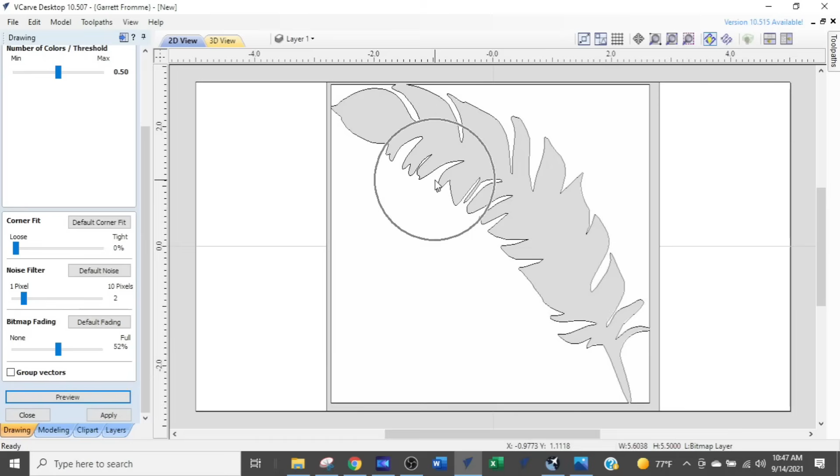So we are going to come back here, and we're simply going to make sure that we are selected on black and white, and we are going to go with the defaults that Vectric selects. You see this slide bar here and here at the bottom — Vectric has defaulted to those. We can adjust those if we want, but because it's a very stark contrasting image, it'll come out quite nicely. Simply go down to the bottom and select Preview, and now you can see we have vectors around our image here, and we're going to click Apply and Close.

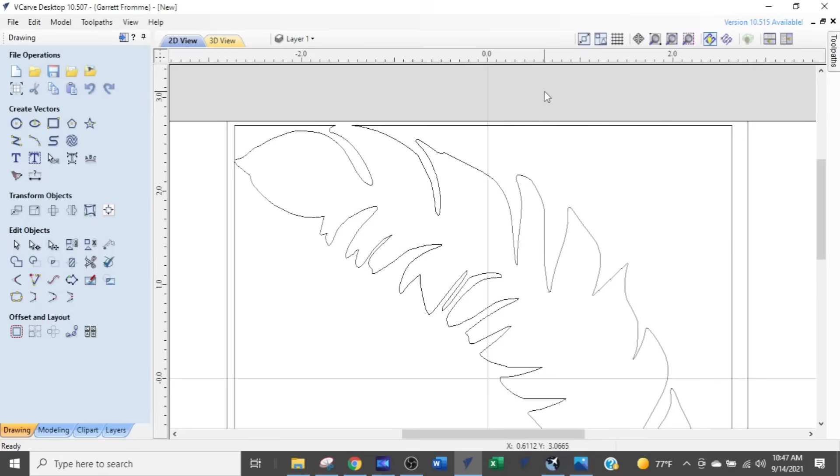So now we come up to the layers area right here, and when it turns blue you click it with your mouse button and this box will open up, and you see there are two layers: a bitmap layer and layer 1. When you imported the picture, it created a new layer called bitmap layer, and that's where the image is at. We don't need the image anymore, so we're going to turn that off by clicking the little light bulb, making sure it says layer 1, and click off.

And there is our feather, but we have to do a little bit of work to it, so we're going to doctor that up. This is why we have to do work to it: you can see the border here is part of the feather. So if I clicked anywhere on the border, the feather is going to highlight as well. I don't want that to happen. I want to make the feather all one vector.

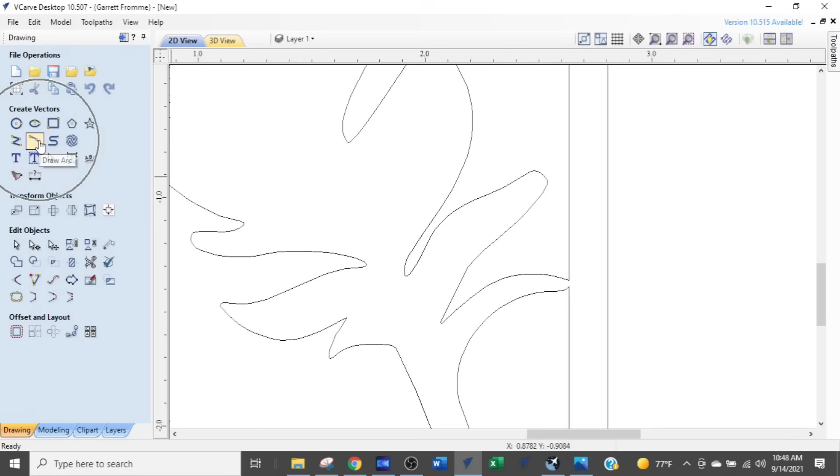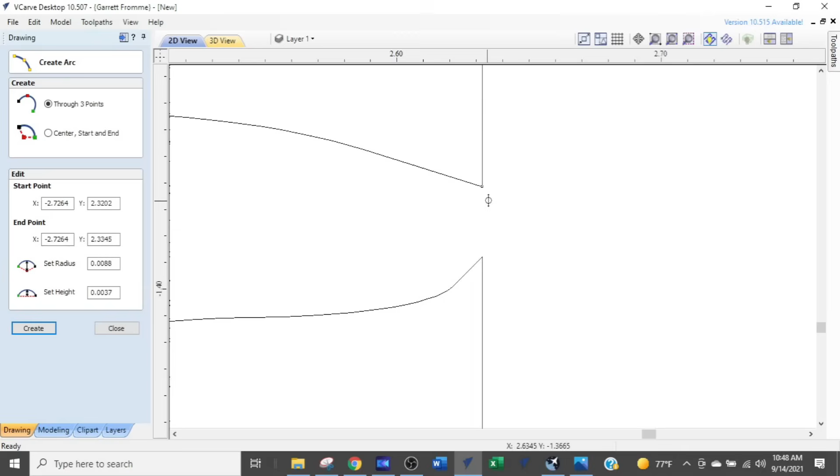So what I'm going to do is grab the curve or draw arc tool, and make sure my snaps are turned on. Both of these first two have to have boxes around them, meaning our snaps are on. Then I'm going to hover over that intersection point, and you can see a little black dot showing up, meaning we're now referencing that point. We just hover over it and click once, and now we've clicked right on that corner.

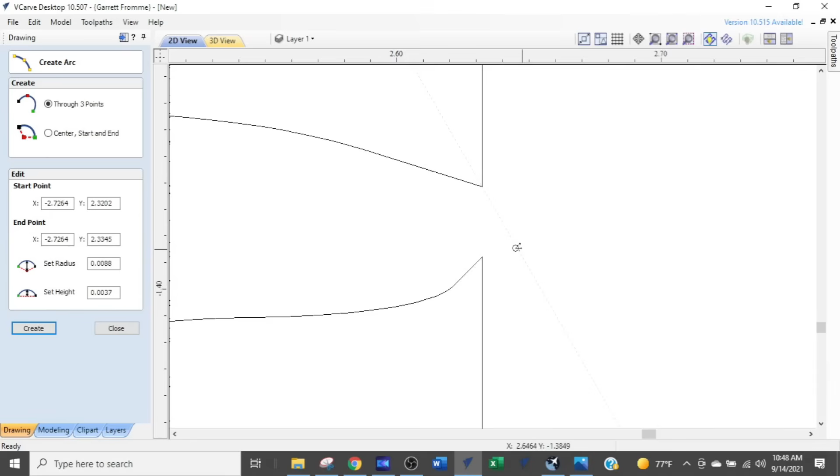And we're going to come over to the other corner and click on that, and then make a little arc about like that. You can see it's not totally clean, it doesn't flow smoothly, but considering the size of this 10-inch piece, you'll never see that minor deviation, so we're not going to worry about it.

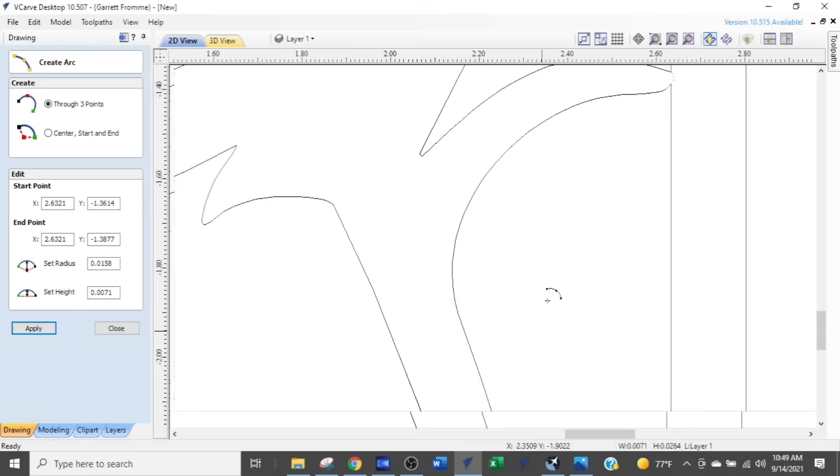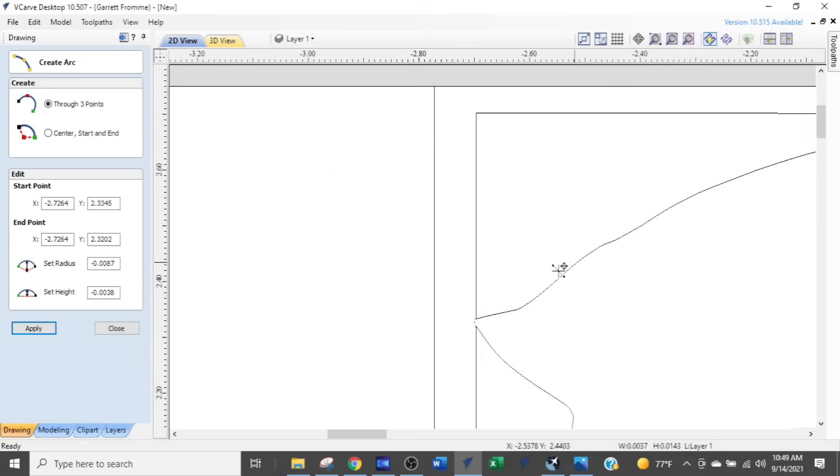And then we're going to do the same thing to each one of these, grab each corner and create the arc, same thing up top, and right here. And there we go. So now we close this, and we're going to grab our scissors right here, because we're going to snip out these things now.

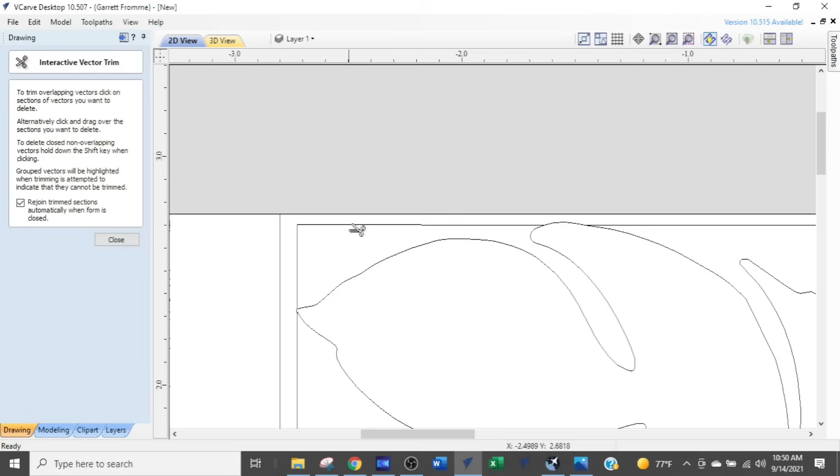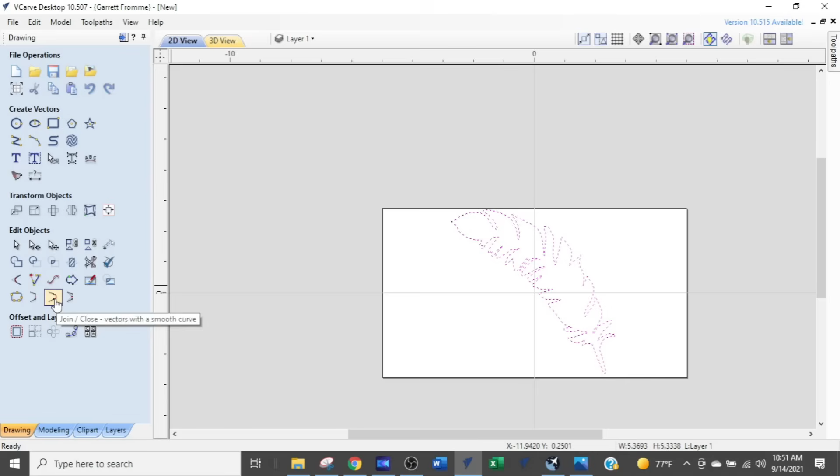The software is now giving us the ability to cut away these areas that we don't want, so we're going to click in each one. We've gotten rid of those, and one more, then we're going to escape, and simply select that box and delete it. And there is our image. Now I select the feather, and just to make sure everything is connected properly, I'm going to come over to Edit Objects and select Join or Close Vectors with a Smooth Curve, and select it several times. And we are done.

So now we want to get the leaf rotated appropriately, so I'm going to click it twice, and these buttons come up around the leaf. I'm going to grab this outer button right there—you can grab any of the four corners—and rotate it to about where I want it, which is about right there.

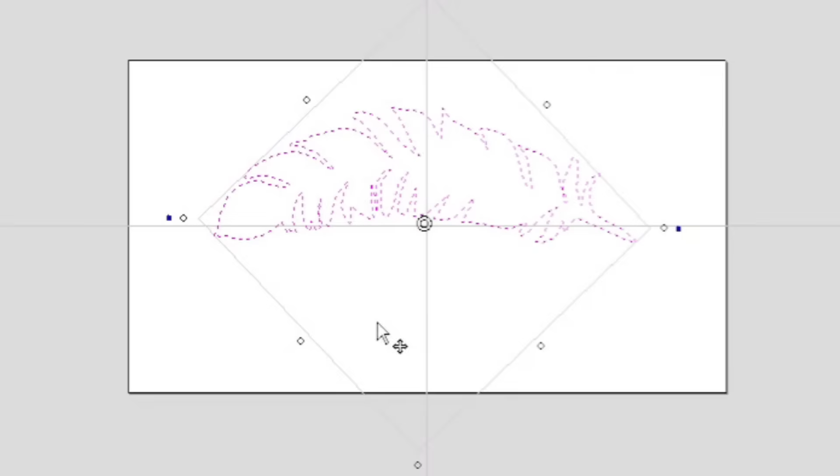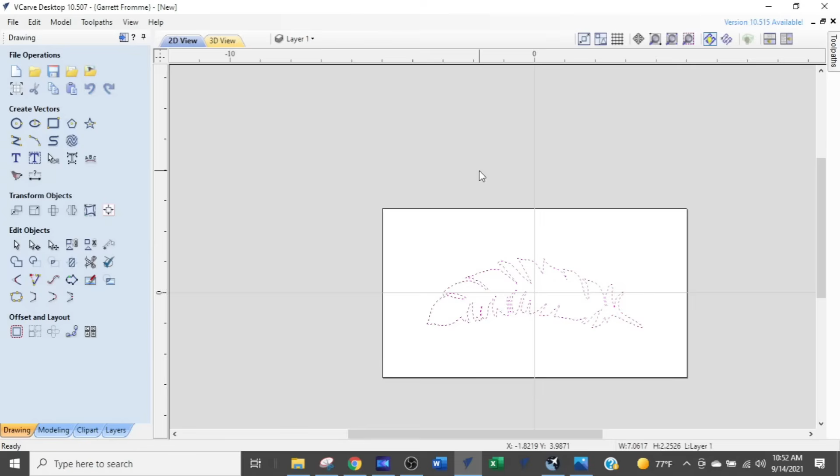And then we want to center it on the project, so we come over and click Align Selected Objects under Transform Objects, and we're going to align it to the job center by selecting this middle button. That'll move the whole drawing to the center of the project, and now you can see the feather is in position. So we'll close that, and we are done with our base drawing.

Now we have to make a quick distinction here so you know the terms I'm using. We have two components we are going to be designing: the insert and the base piece where the insert gets inserted to. We're going to call this the male component, and this the female component. So what we're going to do is save this by clicking Save.

And I am going to create a new folder called, we'll call this Feather Teach, for teaching you, because you're going to create this awesome project. So we have a male and a female that we have to create, and we just need to decide which one we're going to create first. It doesn't really matter—this one will be the female, so we're going to call it feather female.

And we're going to say OK. So now we just saved that vector file. Now we have to create the male file. So simply what we're going to do is come up to File and Save As, and we're going to call it male feather. And save that. So we are at a critical point right now.

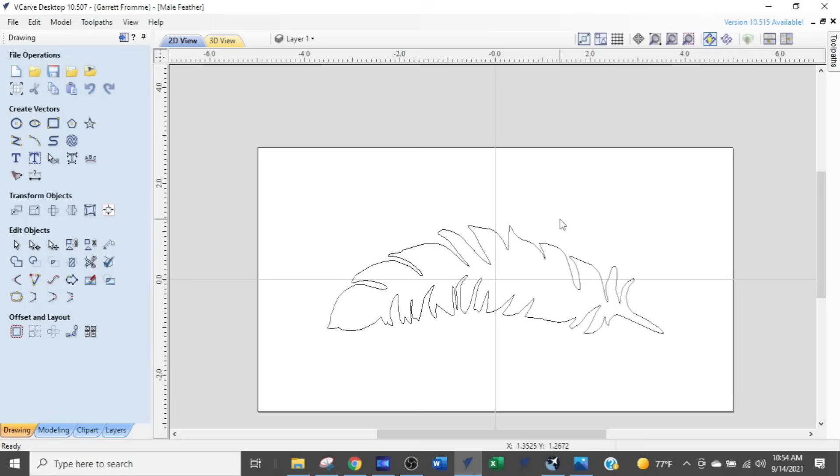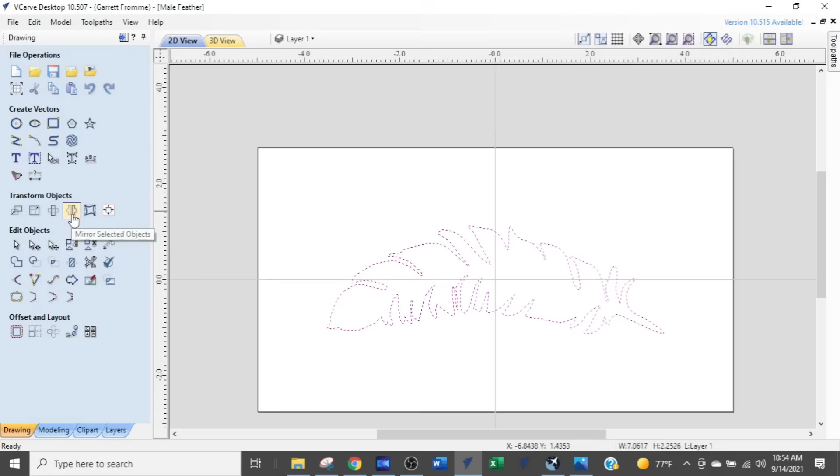Let's keep going. Now we have to create the mirrored copy. What we're simply going to do is select the male feather, and this is where things become very important. In order for this thing to fit into the female feather, we have to create the mirror. The way we do that is come over to Transform Objects, and the fourth icon in will say Mirror Selected Objects.

Select that, and we want to make sure that we are checked on Flip About Job Center, and we do not want Create a Mirrored Copy checked. If we do that, then a second feather will show up as a mirrored copy and the original will stay in place. And we are going to click Flip Horizontal.

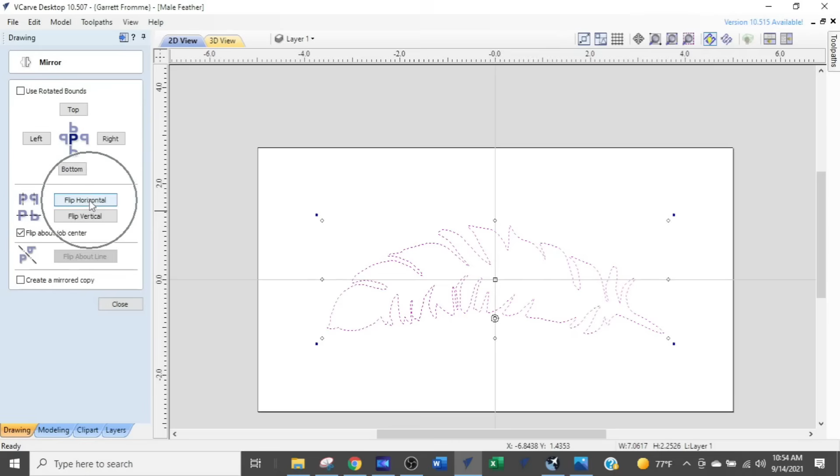And now we have the male feather as a mirror. So we are good to go with that. So we're going to close that. We're just going to save this real quick. And now our base male feather is created.

So what we need to do is create some clearance space so that this feather can slip down into the female.

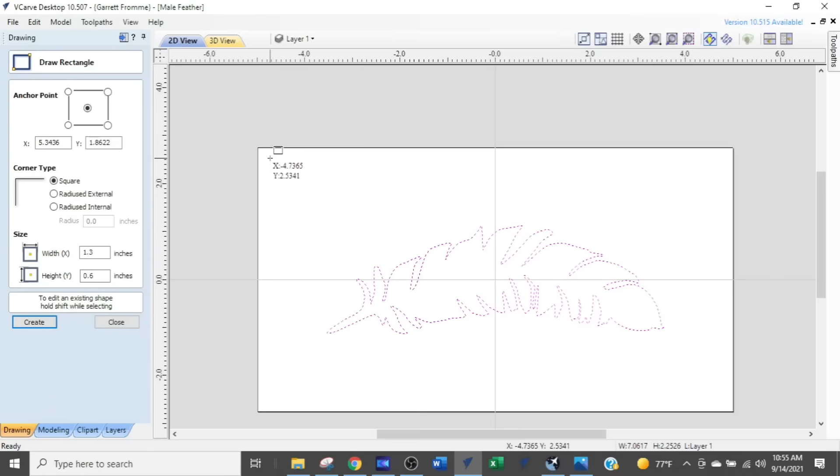One of the things that is commonly taught all the way across the board in all inlay videos I've seen, they come in and they will draw a square that's the size of the project. So let's just pretend this is the size of the project there, and they'll draw a square that big. And the reason being is because you want to clear out all this material so you can overlay this part into the inlay.

And so you need to remove all the material around it. Now, I happen to think that that is a bit of an overkill because you have to machine out all this material in order to make that happen.

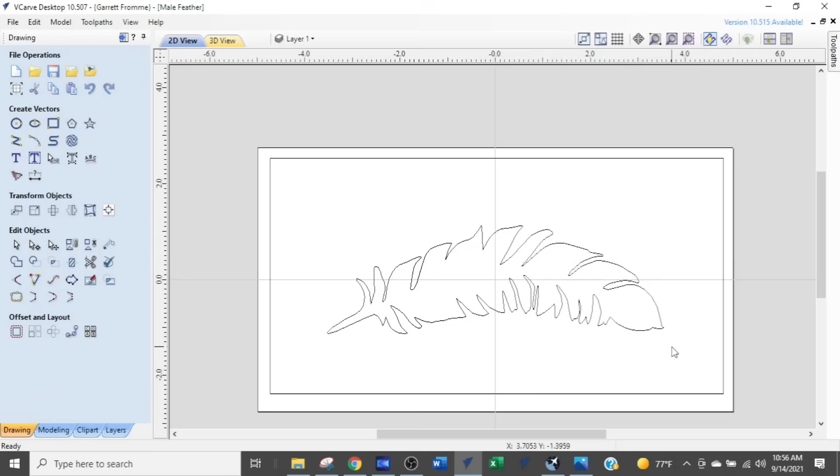Whereas what I like to do is simply cut some of the material around the feather and then take a scroll saw or my table saw and cut away all the material up into the clearance area. So you'll see what I mean about the clearance area. But just leave it to this, that this is taking up a lot of extra machining time to accomplish what most people are teaching. So I'm going to teach you a faster little trick.

So we're going to delete that rectangle. We're going to select the feather, and we're going to come down to Offset and Layout and select the first item, which is Offset Selected Vectors. Click that, and make sure you are clicked on outwards or right, and pick your offset to be between half of an inch to 3/4 of an inch, and I am set at 3/4 of an inch, and we're going to offset.

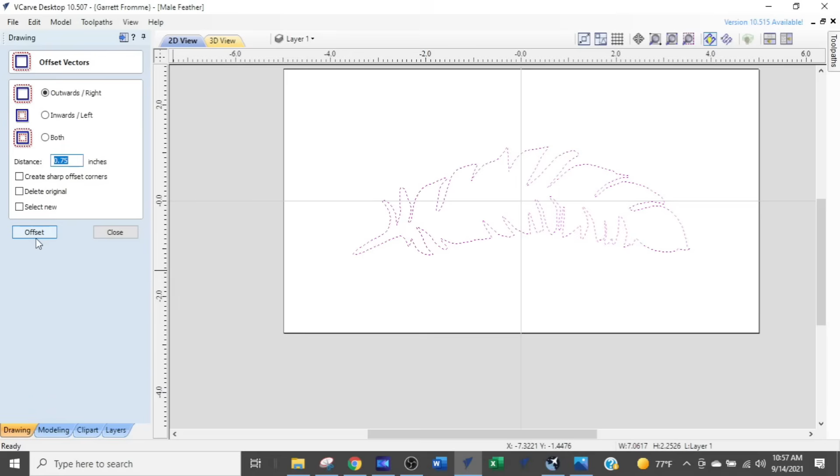Click the offset button, and now you see there is a general shape of the feather. So now all we have to do is clear out this space instead of all of this space here. So this part is done. We are ready to machine it.

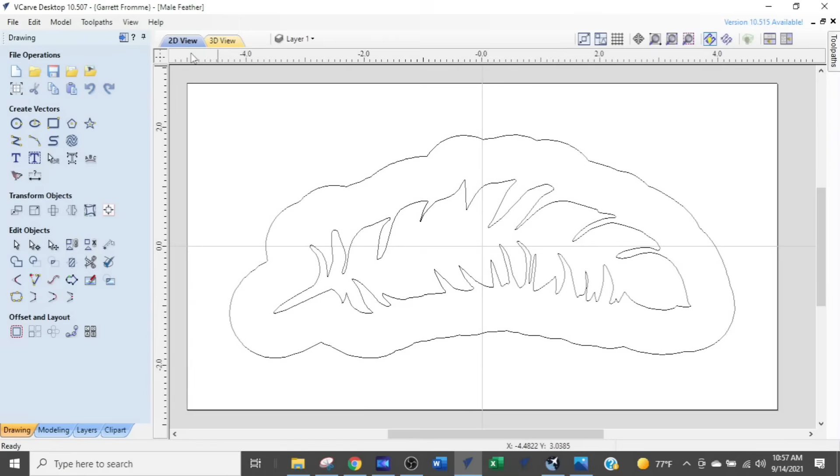So we're first going to save. Click that. And then we're going to click this blue button right up here. So click this button, and that'll turn off the CAD or the drawing area, and it'll turn on the toolpath area.

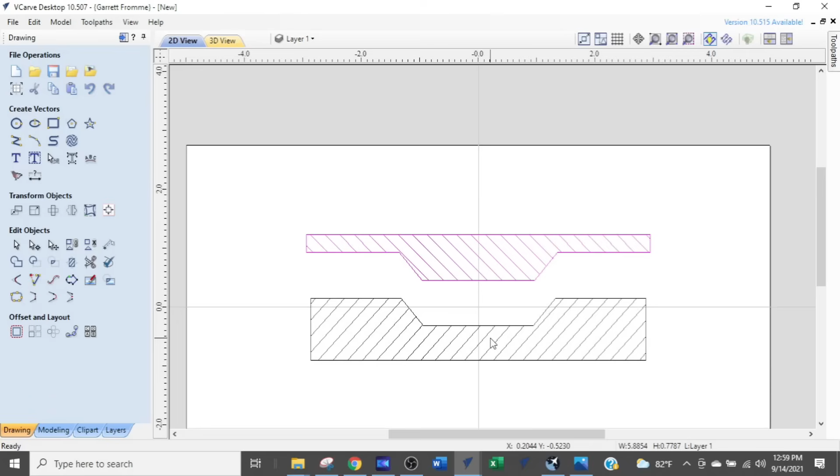So now we are ready to do our tool paths for both our male and our female. But there's something I want you to understand before we get started. So we're going to switch over to another drawing. And so this is effectively what our project would look like if we took a cross section from it somewhere.

This one here is the male component, what we're getting ready to do the tool path for now. And this one here is the female component, where the feather will inset into it. So this is oak, this is walnut.

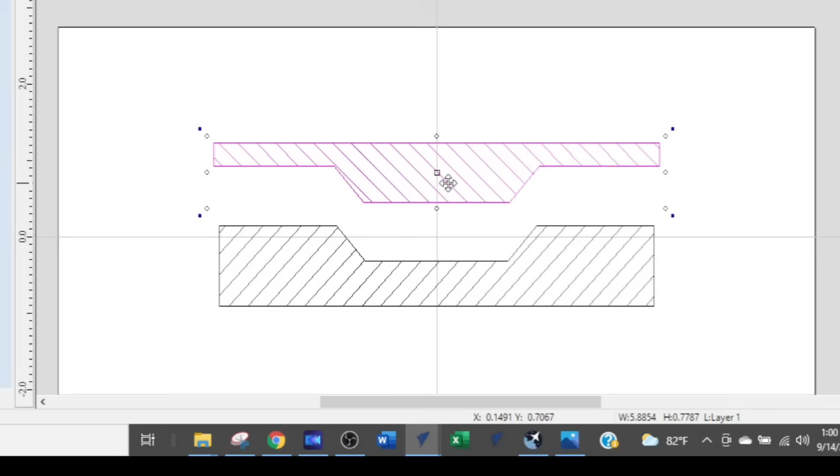Now when we put an inlay into a project, the one thing we don't want is for the bottom of the project to be flush with the inlay, because there's no place for the glue to go. There may be some slight deviation on the side walls of the project that may create some gaps.

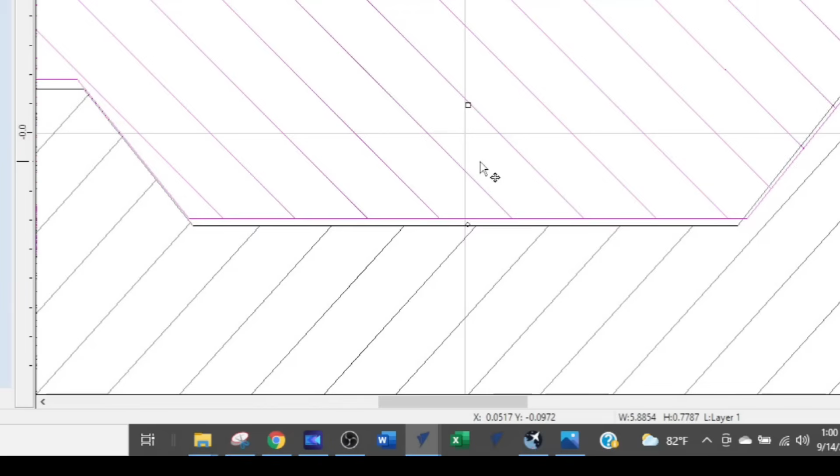So we're going to set up some tool paths. What we have is we are actually contacting the side wall here and over here before the bottom makes contact and before the top makes contact. That way we'll have a nice flush contact all the way around, and we'll be able to clamp the top piece down to the bottom piece, and there will be no gap in our inlay.

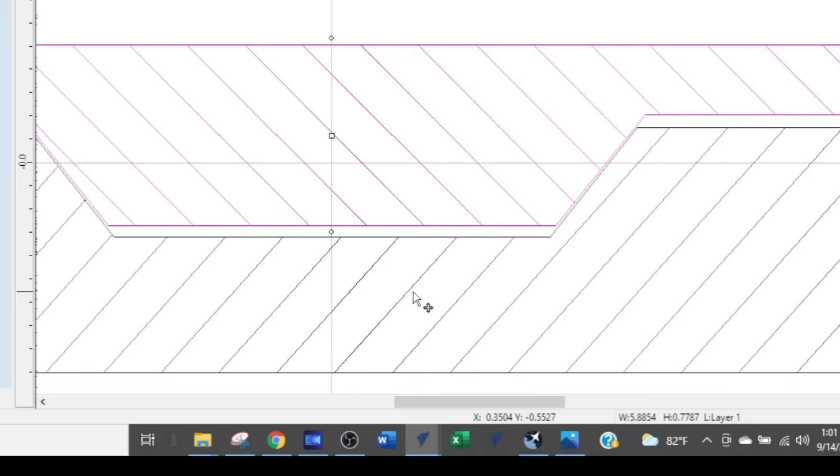The numbers I'm going to give you, I want you to always use. Don't try to reinvent the wheel. They work for many people. You've probably watched a lot of videos of inlays, and people use some random toolpath numbers. I want you to use these numbers and trust that they will work as we go along.

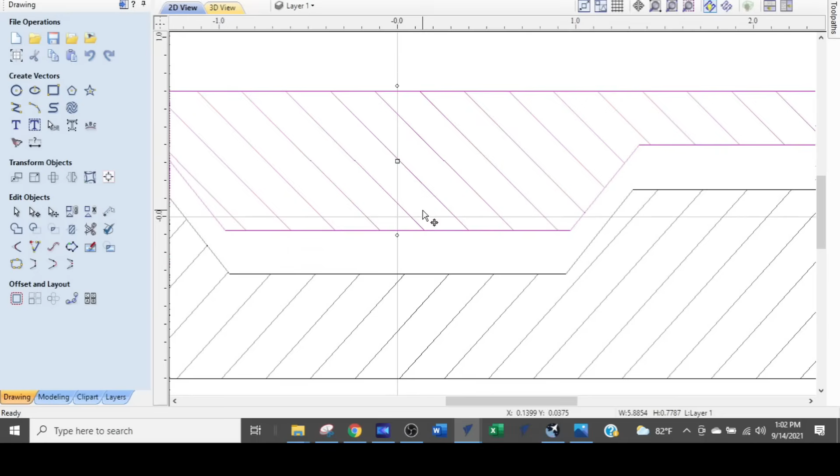Okay, so the first thing to know is when we look at this, because we are tapered, we're going to use a V-carving toolpath to carve both of these projects out.

However, we have a piece of wood, and we've already created this boundary, and we have this boundary because we need to create a V-carve, and we are going to V-carve between this boundary and this boundary. So all this will be V-carved.

Now if you've done any V-carve work before, you know that the bit will go all the way down until it creates a V in the middle. In this case, with such a wide area, which is something that we want, that V-carve would be really deep. So we are not going to go all the way down.

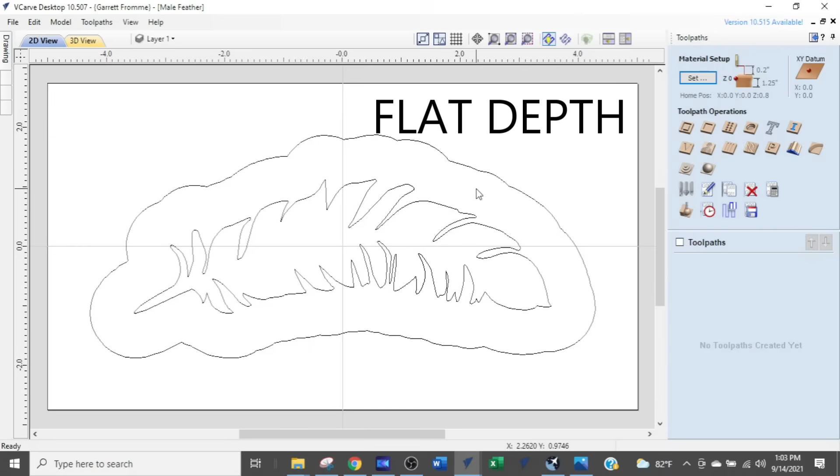We're going to use a special feature in Vectric called flat depth. You will find this in the majority of your paid softwares, and I don't think you'll find them in the freebie softwares like Carbide Create or Easel. However, you can manipulate those softwares to make this work. Also, maybe I'll do a video on that sometime later.

Anyway, so we want a V-carve right in here all the way around the feather. So we are going to use the V-carve toolpath. Now again, remember this is the male, and we are going to use very specific numbers here.

Our start depth needs to be 0.09. Use that number as your start depth. Then you're going to check the flat depth box. We don't want to get this V all the way down, so we want to stop that at some point. And that's what flat depth does. It stops the V-carving at some depth.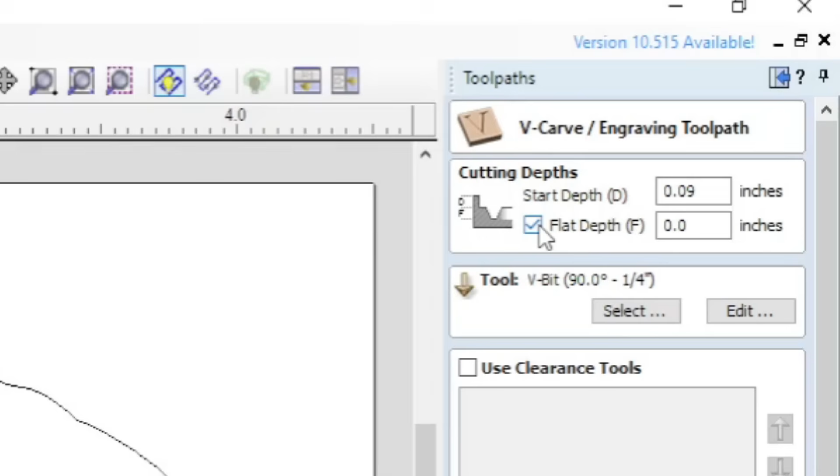And we're going to set that depth to 0.02. What this will do is allow us to have a 0.02 gap right here and right here, which means these two walls are going to make contact, and that's exactly what we want. We need a place for the glue to ooze out from these two contact points. So this will leave a gap underneath for the glue to settle in, and it'll leave gaps over here and over here for the glue to ooze out.

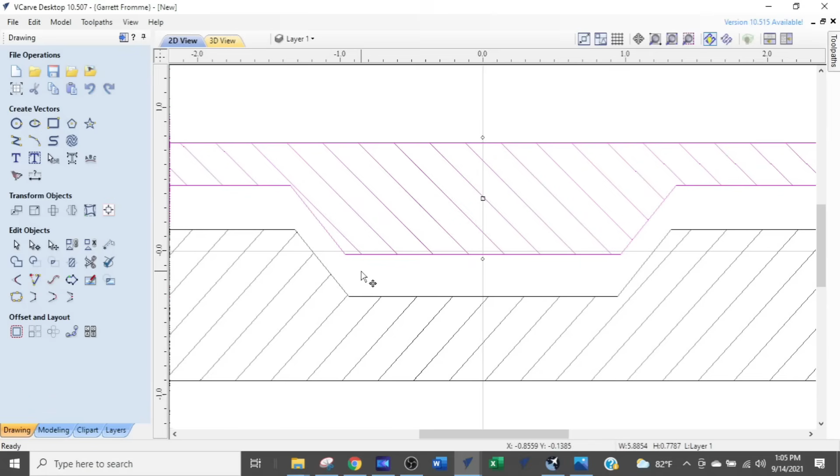So these numbers are very important. Please do not reinvent the wheel and try to use a different number. These work. They've worked across the board. Despite any other YouTube videos you have seen where people use different numbers, these numbers work very, very well. So please use them.

The next is the bit itself. Now, for average size projects like this feather, I like to use the 90-degree V-bit.

So we're going to select that. The bit I'm going to use is the 90 by 1/4 with a bladed edge on it - an actual cutting edge as opposed to a flat edge. Here's the difference between the two. This is a flat edge V-bit - you can see the cutting blade right here, and as it spins around, it's literally scraping the wood away. Whereas the bladed V-bit actually has a forward cutting knife edge on it. It's considered a knife V-bit, and these leave a much cleaner cut.

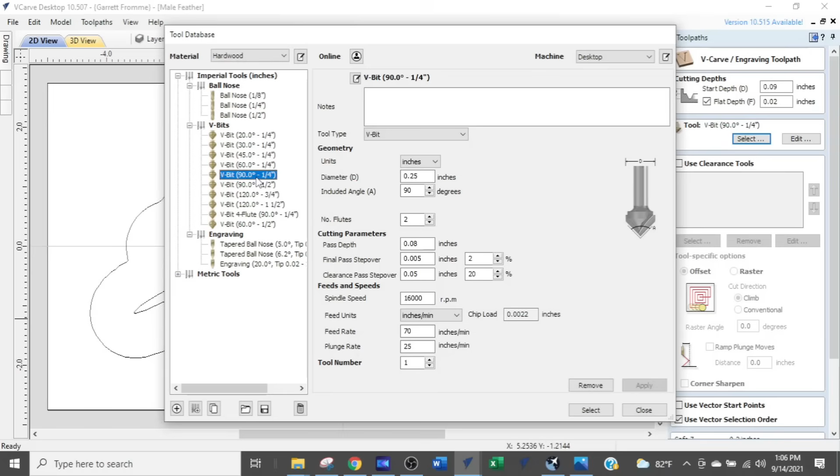So this is the one we will be using, 90-degree by 1/4 inch diameter. I use that because it leaves a much cleaner cut around the project. So it's a 90 by 1/4 inch, and we're going to select that. Now, because we have a flat depth here, as we're set up right now, the 90-degree V-bit is going to try to clear all that out with a point. That's a lot of space to clear out with a point. We don't want to take that time - it'll take a long time.

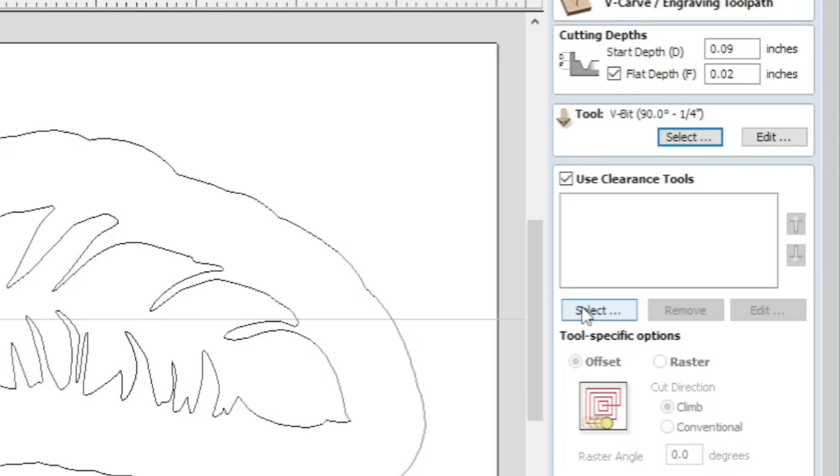So we're going to use the clearance tool feature. You want to check the clearance tool box right there, and you notice that this box now has turned white, which means now we can insert something. The bit I'm going to use is a very aggressive bit, which is an upcut bit - it's a 1/8 end mill. I'm just going to select my end mill here as a 1/8. This is my general end mill 1/8, and we're going to change the settings in just a moment. I'm going to hit select, and now we have the 1/8 bit.

We're not going to use a down cutting bit. We don't need to - we're going to be doing a V-carve, which means this side and this side are boundary, this boundary and this boundary are going to be V-carved. The clearance tool is simply going to clear away the material around the V area just to make things a lot faster. So an upcut bit - there's two reasons why we're using this in an inlay. Number one is the edges don't matter. If you know upcuts, it will tear the upper edge of your project, but in this case it's not going to matter because we're coming back across it with a V-bit that's going to clear all that away. And the second is an upcut bit can be much more aggressive than the down cutting bit.

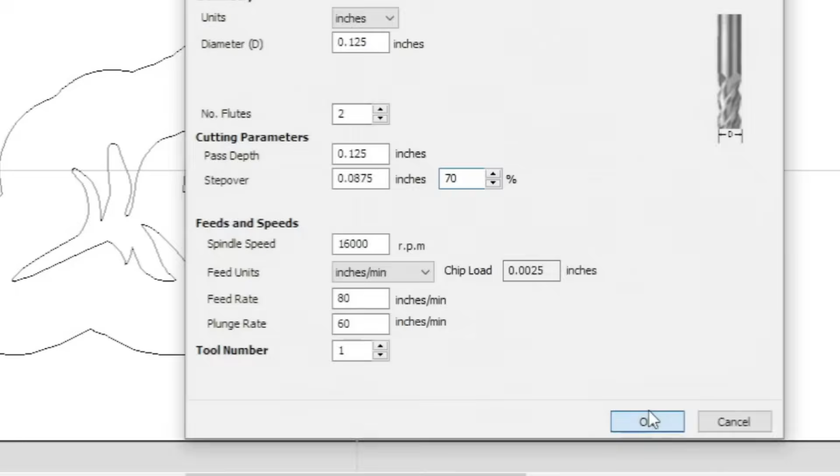So what we're doing is we're going to make that 0.125, which is what you can do with an upcutting bit anyway - you can bring that depth of cut up to the diameter of the bit, or even 1.5 times the diameter. So we've got a very aggressive cut, and we're going with a 60% step over, because I don't care about the finish. I'll even go to a 70% step over - I don't want to exceed 70. And we're going to click OK, and now that is set up.

And now we're all set up. I'm going to refresh or rehash this. When you're doing the male insert, you do this in a V-carve. Your start depth will be 0.09. You will have your flat depth checked, and that will be set at 0.02.

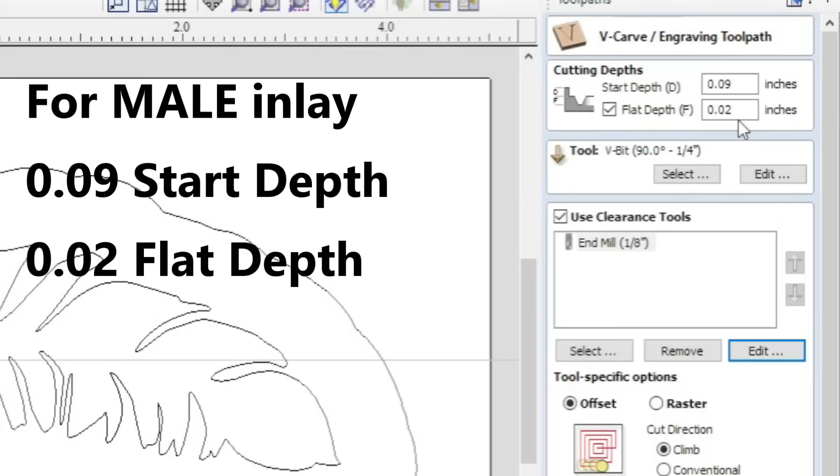We're going to use a 90-degree V-bit. Use a 90 for your average size projects. If you go to small inlays, you'll want to use a 60. If you go to large inlays, use a 120.

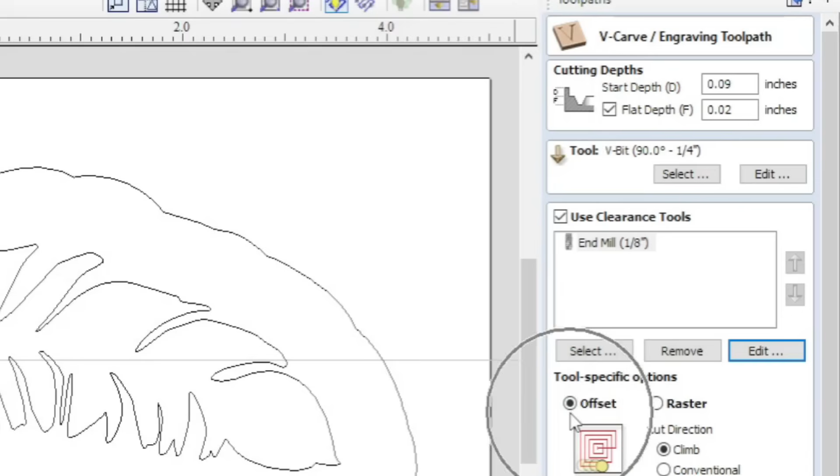I will give you the G-code file. So we're using a 1/8 upcutting aggressive bit at a very high feed rate just to get material out of the way, and we're going to go with the offset cutting method rather than the raster. Climb or conventional doesn't matter.

We are simply going to give this a name. We're going to call it feather male, and we are going to calculate. I didn't select the vectors, so we'll select the vectors and then we'll calculate. And now there are our tool paths.

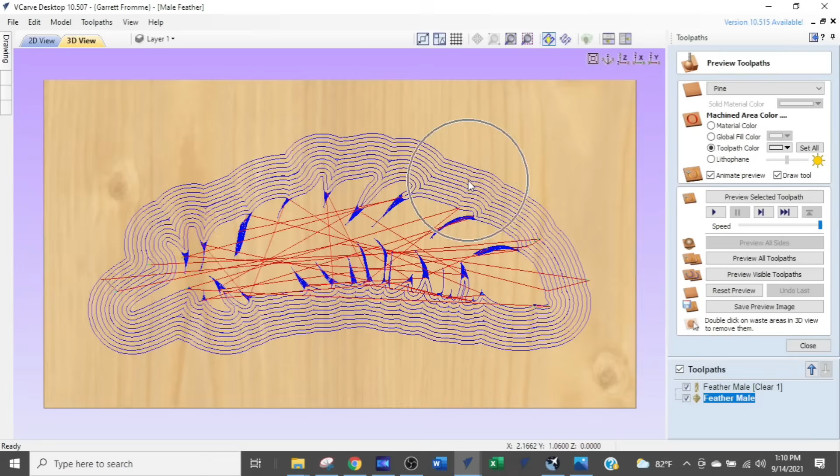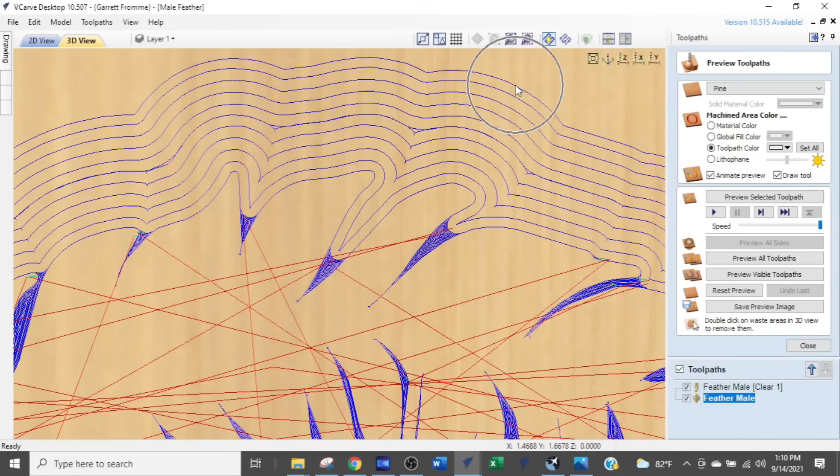So the broad tool paths out here are the 1/8 bit, and the paths up in here, all these dark areas, are the 90-degree V-bit. The 90-degree V-bit will also come across this tool path, and probably this one as well, and it'll do the outer tool path, creating a V-carve type of effect, or a tapered feather that will insert into a tapered female feather.

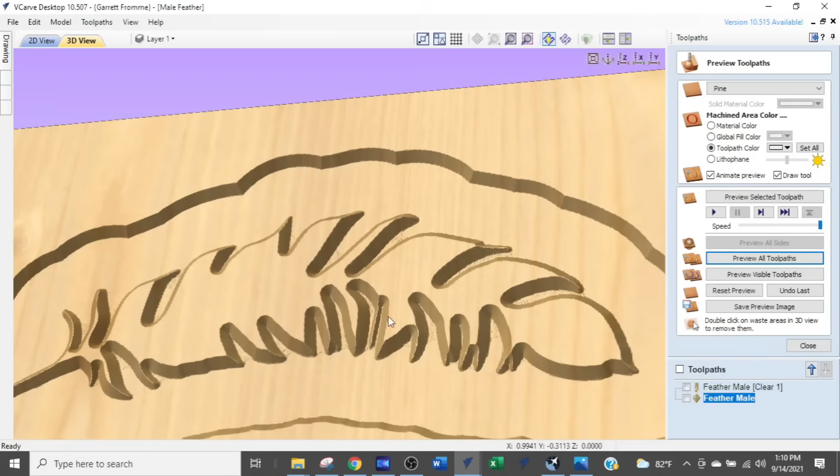Alright, so with that, we'll just preview it. I'm going to preview all tool paths. And there's our feather. Now you can see we have tapers all the way around the feather, and we have a taper out here. It doesn't matter out here, it's just by the nature of the V-carving tool path that it's going to look for an inner and an outer boundary, and it's going to cut them both.

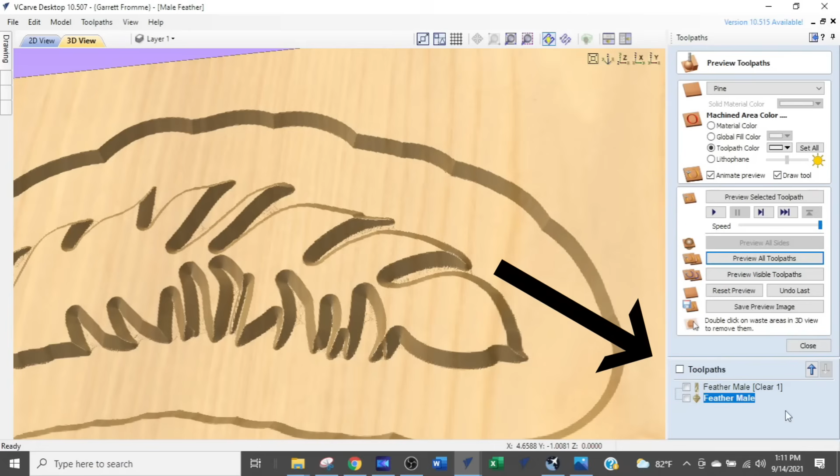So even though it's going to cut that, it's irrelevant. This is what's important. Now, one of the things we're going to do is we are going to name our tool paths. We used a clearance tool and a finishing V-bit. So the first tool path here is our clearance tool, and that's a 1/8 bit. So what we're going to do is right click that first one, and rename it to feather male 1/8 UC.

That stands for upcut. And we're going to put a 1 after feather male. We're going to put a 1 in there, and the reason is because that's telling us that's the first program to run. You'll understand this in a second. In the second one, we're going to rename it feather male 2 90V.

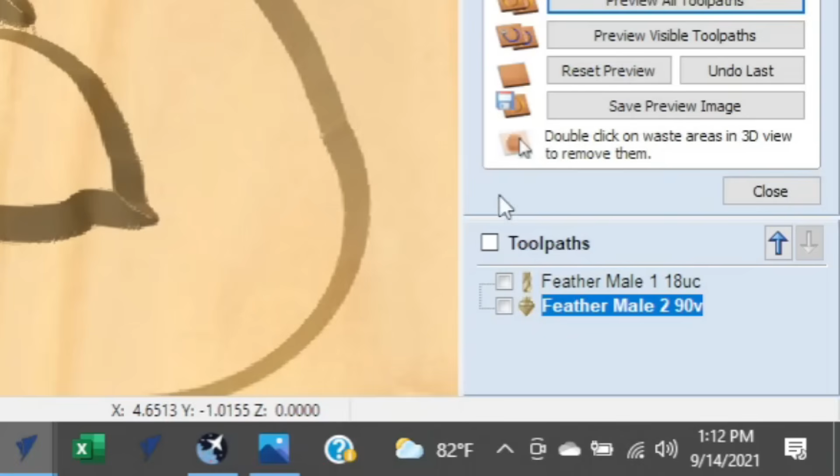So now we've got that complete. I'm going to close that, and we're going to save the tool path using this button right here. So we click that, and we want to save all the visible tool paths, and we are going to come down to the word tool paths, the checkbox next to it, and select that checkbox. Now you can see these two checkboxes are selected. That's what this button does. It does a global selection of all the tool paths down here.

With the visible tool paths to multiple files, you want to make sure your post processor is set up. I am using the Grbl inch post processor for the Long Mill CNC router, which works just fine. And then we're going to save our toolpaths.

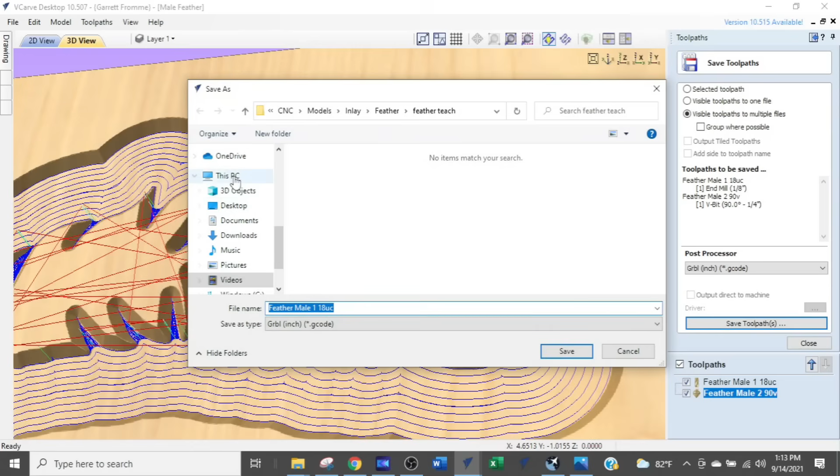I'm going to create, so I have the directory, I've already created it, we're calling it Feather Teach. So you see down here it says Feather Male 1 1/8 UC. What I want to do is delete the Feather Male 1, we'll leave the Feather Male but delete everything else. And then we're going to click Save.

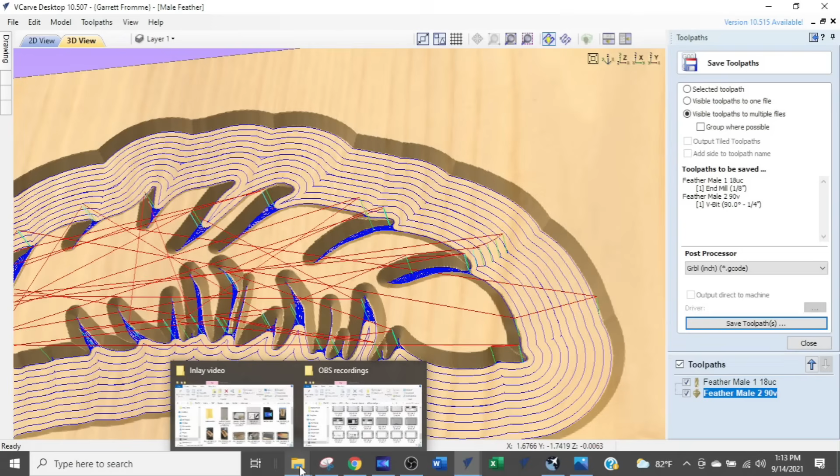And now when I open up that directory, let's see if we can find it. We're going to go to the Feather folder. There it is, Feather Teach. We have 2 G-codes written for the male, titled Feather Male 1 and Feather Male 2, 1/8 UC. So Vectric, based on the order of toolpaths over here, put a 1 or a 2 in the name. So we know this is the first one to run and this is the second one to run, and by the file name we know that's the 1/8 upcut end mill, and this one is a 90-degree V-bit.

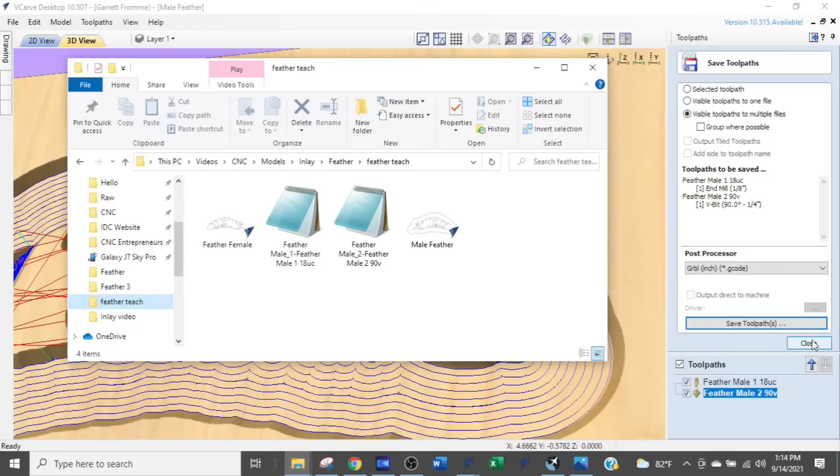So we're going to stop with that one. We're going to close this and save this file.

We're done with the male aspect of this as far as the design goes and generating a toolpath. Now it's time to get on to the female. Just remember, the settings that we're using are very specific, so please keep note of that, and they are listed down below with the female settings that you'll need.

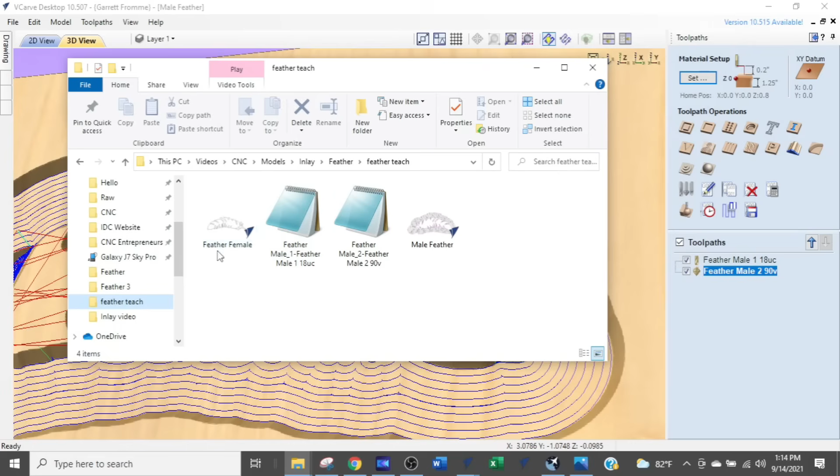Let's go on to the female. Now we're going to open up the female. I'm going to go back to that directory, and we want to open up female feather. So I'm going to double click that.

And there it is. So this is our project piece, the entire piece of oak, and all we're going to do is cut out the feather inside of here.

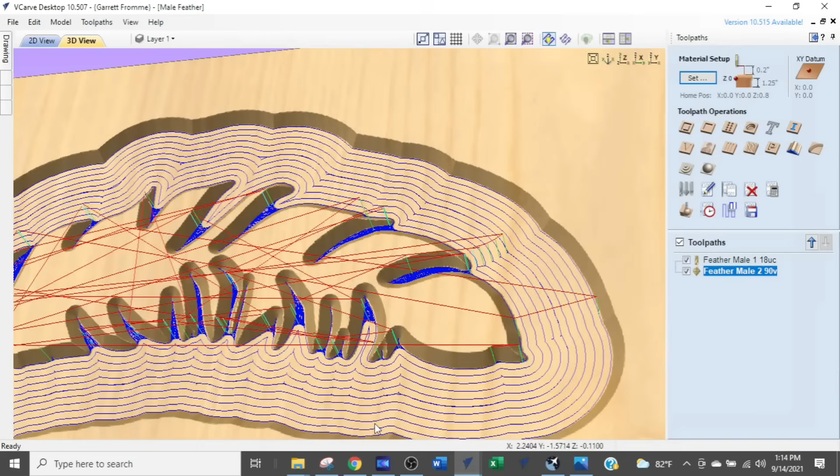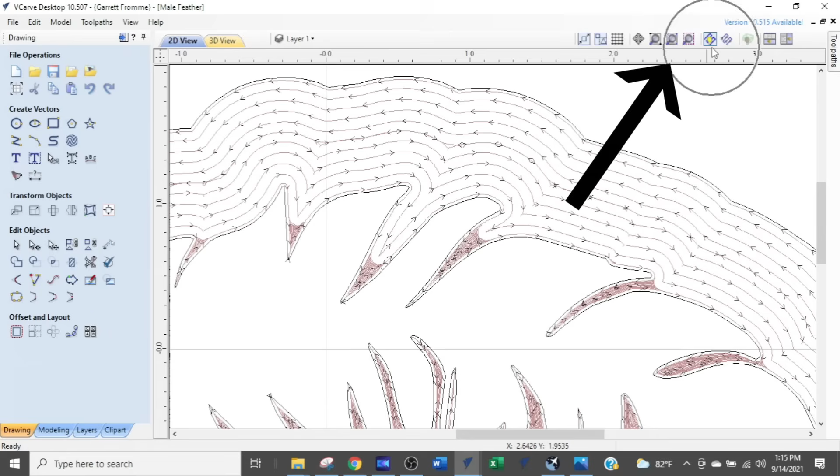Now I just want to show you what we have. I'm going to come over to the menu and switch back to the 2D view, and I'm going to turn these lines off. By the way, these little lines you see are the tool paths, the actual paths and direction the bit is going to go. In order to turn that off, you come up to this area where you have all these icons, and there's one that's highlighted with a little blue line. Select that and that'll turn it off.

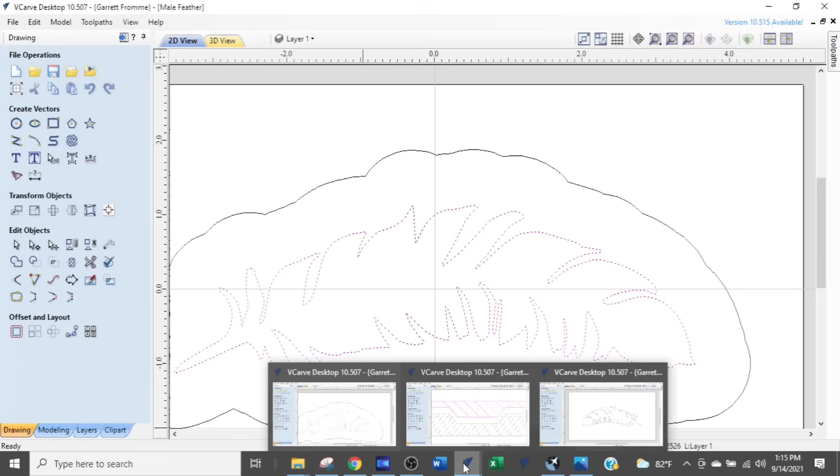So this is the male feather, if you remember. I'm going to click that and Control C to copy it, and then go over to the female and Control V to paste it over. Now you see it's a mirror image of that feather. So this one is the female, this one is the male we just created. I just want you to see that they are duplicated, but they're reversed. So I'm going to delete that one because we don't want it.

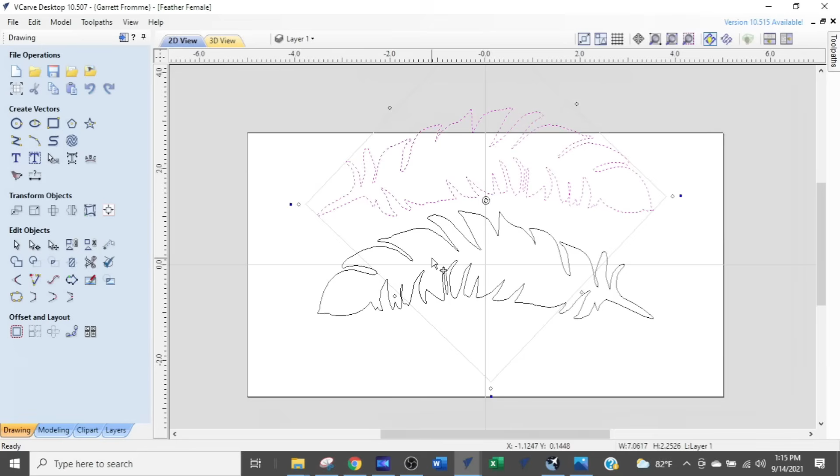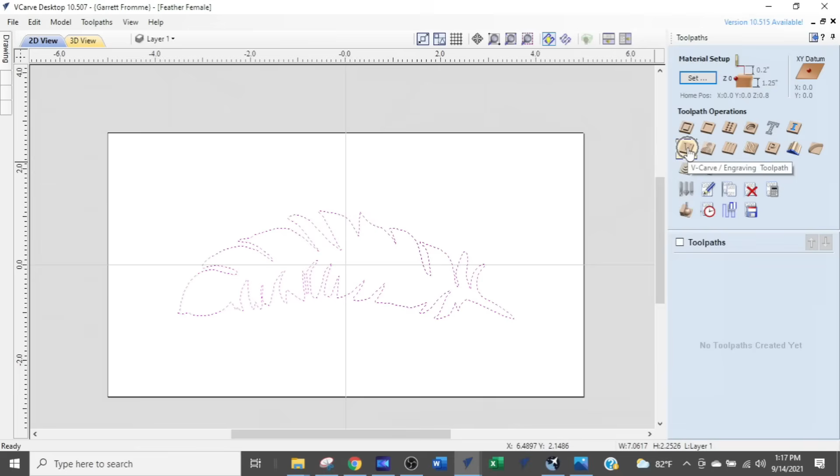Now we're going to generate the tool path for the female feather. We're going to come up here and click this blue button, bring in the toolpath area, and select that. We're going to go into the V-carve toolpath, select that, and we have the numbers in there that we had when we entered into the male. We don't want those numbers.

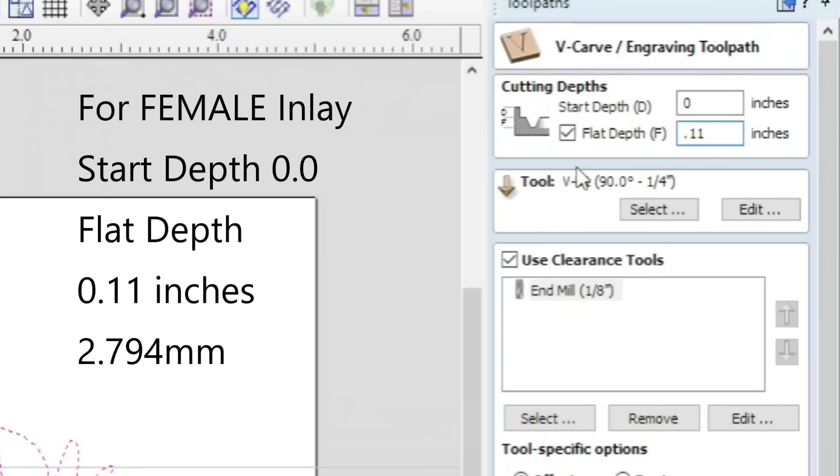Our start depth for a female, write this down: female is a V-carve, and the start depth is 0. The flat depth will be 0.11. For the female section of the V-carve, your start depth is 0, have your flat depth checked, and that flat depth is 0.11. We want to make sure we're using the same bit, which is the 90, and that's fine.

Now I'm going to take a look at my feed rates just to see what we got. I've got a 70 feed rate, which is just fine. So we're just going to cancel that and leave it at that.

We're going to use the same 1/8 end mill, so we want to use our clearance tools, make sure that's checked, and we have the end mill. It's the upcutting end mill that's suitable for aggressive work and for drilling. Again, we don't care about the edges that it creates because the 90 V-bit is going to come back in behind it and clear up any chip-out that it has.

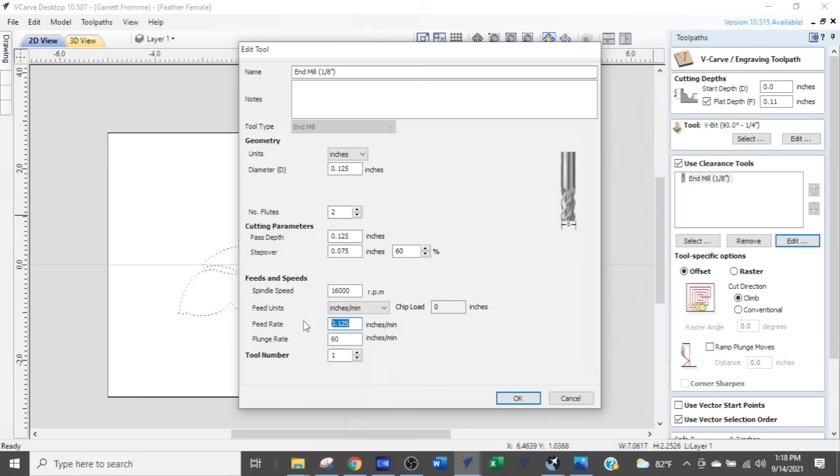And we want to check our feed rate. So we're going to go to edit, and I want to make sure we are up there, and our feed rate is in - for some reason I have 0.125 in there. I want my feed rate to be 80. And I'm going to say OK.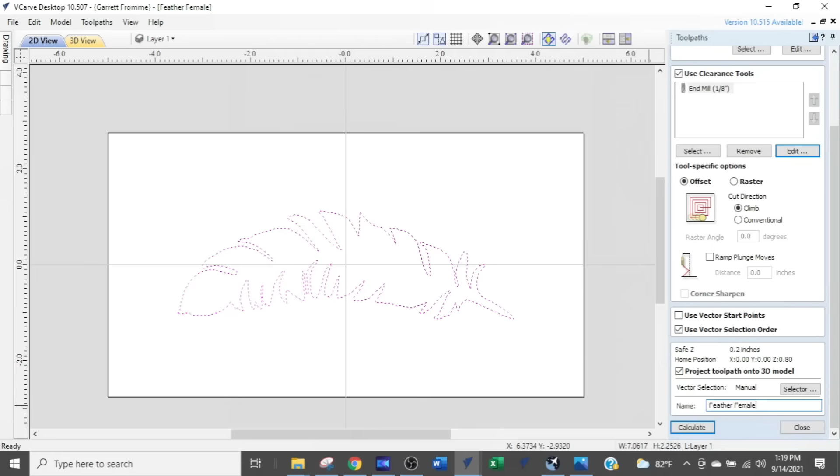And there we go. So everything is set there now, all the original settings there, and we are simply going to change the name. We're going to call it feather female, and calculate.

And so there is our female. We are going to preview all selected toolpaths. And now you see we have the female with the tapers. So the male is going to drop right into that.

So that's done with the exception of changing the name. We're going to simply change the name of the first one, which is the roughing. We're going to call it feather female, 18UC. And we're going to go to the second one, we're going to call it feather female, and that's going to be 90V. And we'll just enter. We're going to close that.

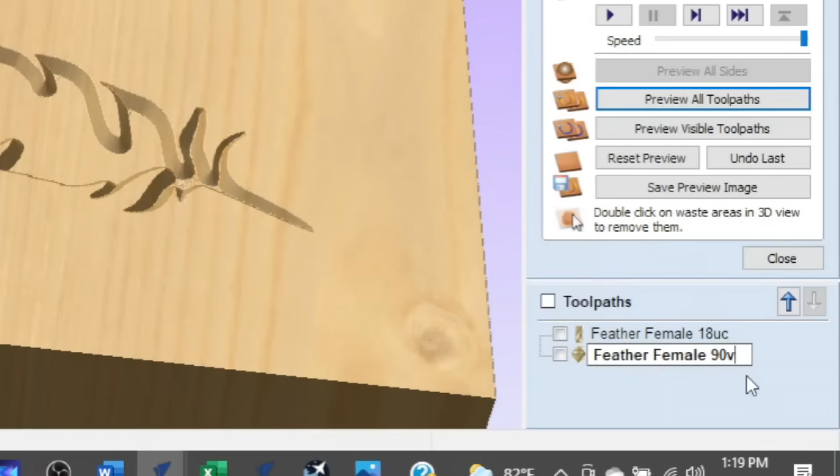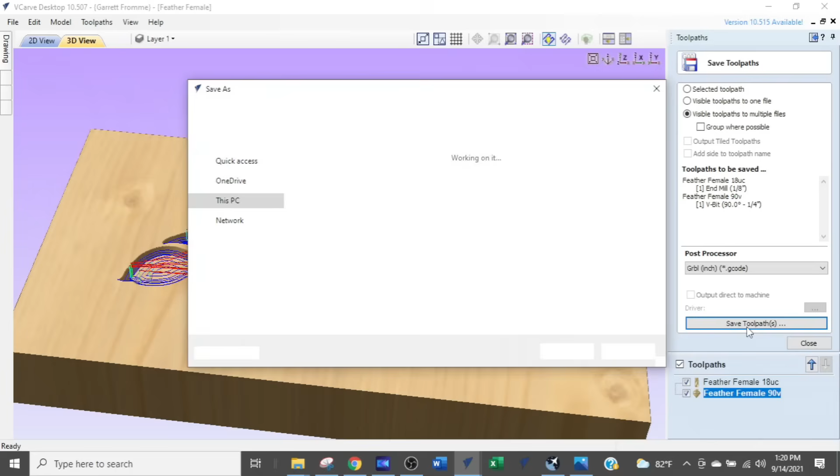We're going to go to the save, click that, come down to our toolpath, check that white box next to it, make sure we are set up on visible toolpaths to multiple files. Your post processor is set to what you want. For the Longmill, it's Gerbil, and we save selected toolpaths. And then we are going to simply take the bit out of the end of the name, and we're going to save.

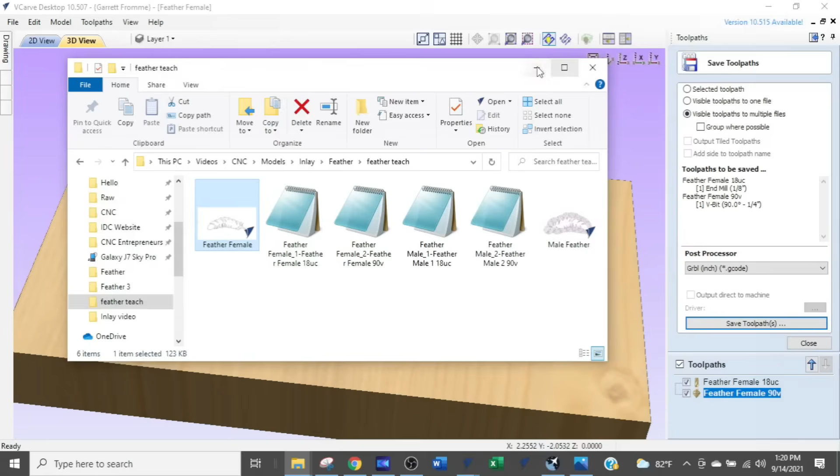Now when we go back into that directory, we have the female toolpath, again named with 1 for the 1/8 upcutting bit and 2 for the 90-degree V bit. So now our toolpaths are set. Now we have to set up the machine. We are ready to take this to the next step.

That's it, we're done with the design. Now it's time to throw it onto our Longmill and get to start making this. I was actually really pleasantly surprised that the Longmill did this. I did not expect this to be as clean and sharp and crisp as it turned out. So getting that machine pleasantly surprised me on this one.

I've had a lot of fun making these. But before we throw this on the Longmill to get these things made, we have to deal with our raw material. So we're going to do that, and then I'm going to show you how to set up on the CNC router to get these things done the easy way. Let's get going.

So now we have 2 pieces of lumber to work with. We have our oak base piece, which we need to measure out at 10 inches long. And we need to cut our walnut, so that's going to need to be 10 inches long as well.

So we'll throw it on the miter saw and make sure the saw is square. I want to try to avoid a step in the middle of the material, although it doesn't really matter if you have a little bit of a step in the material.

The walnut, we're going to cut it in half, because when you do an inlay it does not need to be very thick. You can do it with a 1/4 inch piece of material, because we're only going to make this thing 0.11 deep. So you can do it with even thinner material, 0.2 thick.

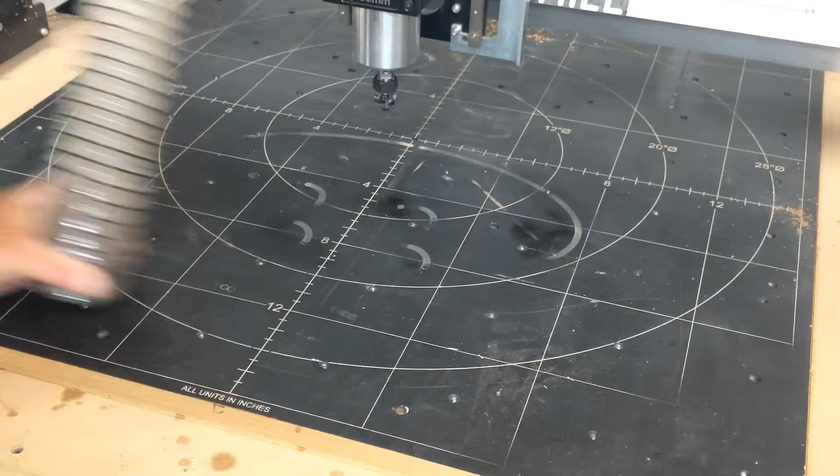We're going to be using the tape and CA glue method, so we have to get all the sawdust off to have as much stickiness as we can with the tape. What we need is our base piece, a little scraper, some painter's tape, and some thin CA glue. This is made by Starbond, and I have a 10% discount code on this if you want. And then we're going to need the accelerator that'll accelerate the setting of the super glue. You'll understand this in just a moment.

Now when you're using this method, you apply painter's tape to your project piece. I am putting 3 strips down, though in this case we really didn't need 3 — we only needed 2, because there's not a lot of force being applied against the project itself by the router bit. After you get it on there, make sure you take your scraper and press it all down so you get as much contact area as possible.

And you see I've got a couple gaps there, no big deal. Now what we're going to do is take advantage of our spoil board grid line, and we're going to put the mating tape on the router spoil board. That'll keep everything in line with the board.

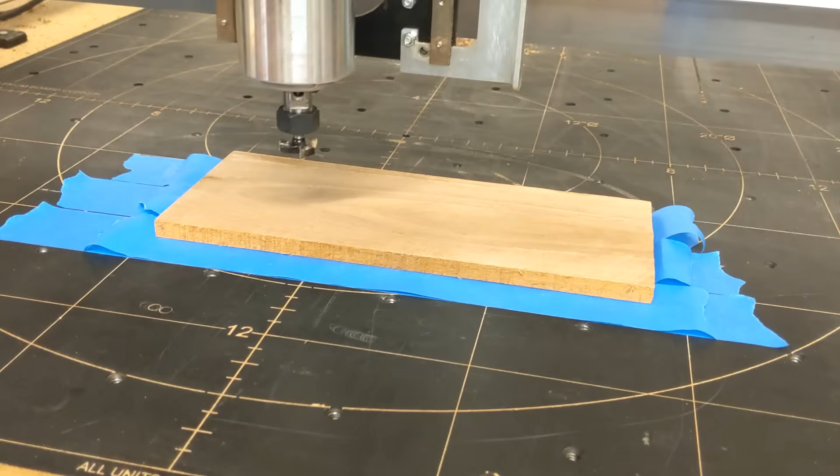So we're going to get our bit set up, and then we're going to load the first program. So we bring the router forward, and we're going to remove what we have in there, which is the surfacing bit. We'll get back to the surfacing bit later because we're going to need it to wrap up this project on the CNC router.

So whenever you take your bit out, take your nut, your collet apart, clean it out with a toothbrush, get the sawdust out of there, because that sawdust will create problems for you later on if you don't do that. So once you get it loosened up, just blow it out. And the first bit we're going to be working with is the 1/8 upcut bit.

And this is it, this is one I sell on the IDC Woodcraft store. Now you can see this spiral is very aggressive going upward. It's meant to take out a lot of material very fast, and it's designed to drill. Now we use a 1/4 to 1/8 reducing collet, and you're going to insert that bit all the way to the flutes into the collet. We're looking for as much support from the router as possible, and then you insert the collet up until it's flush with the nut, and give it a little extra tightening because we're using a collet in a collet. Now you see I've only got about 1/4 of an inch sticking out.

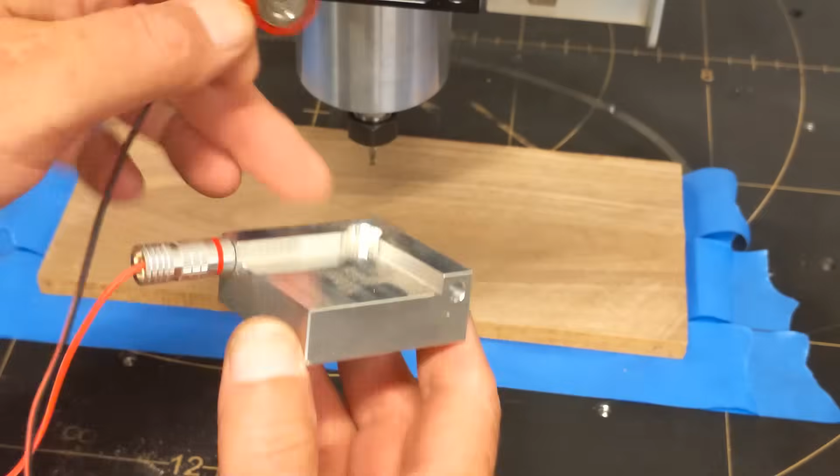Now we're going to use the touch plate. Now Longmill comes with this touch plate, you don't have to order it as an add-on. But this is very rapid in getting your router bit set up, much better than the paper method. So you bring the bit relatively close, maybe within 1/4 inch of the touch plate. And make sure your magnet is attached, because that's needed to be there. And then start the zeroing cycle. And the bit will come down, it'll touch the plate to get its first reference. And then it'll come down a second time to get a final reference, and we are good to go.

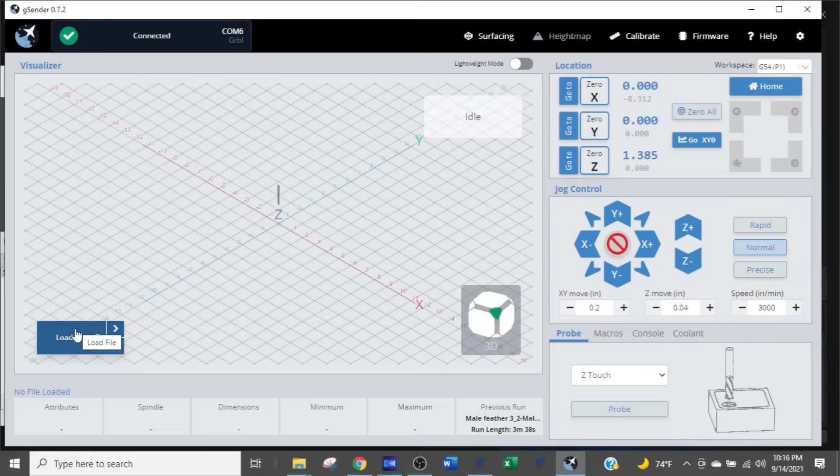Alright, now we are ready to go. We have our bit zeroed out, and we are now going to load our first program, which is the Feather Male #1 with the 1/8 upcutting bit. So we're going to come down here to the load file, select that, and we're going to go to the directory Feather Teach, and we are looking for the Feather Male 1 with the 1/8 upcut, and that's it right there. So we're going to select that, and it's going to load up into the software, and there it is.

There's our run-around. So with that, we are simply going to turn the router on, and we are going to hit the start job button, and we're off. So the first thing this thing is doing is cutting out the outer outline of the feather. Now look how fast this 1/8 bit is traveling.

This is why I use an upcut on this. We'll speed things up. This gets interesting - this is where the real fun begins, and you are going to so much love doing this when you finally get to this point.

What's really interesting is how fast every cycle runs. This is at 80 inches per minute, and we're cutting 0.11 deep. So now it's cutting in some of the detail of the feather.

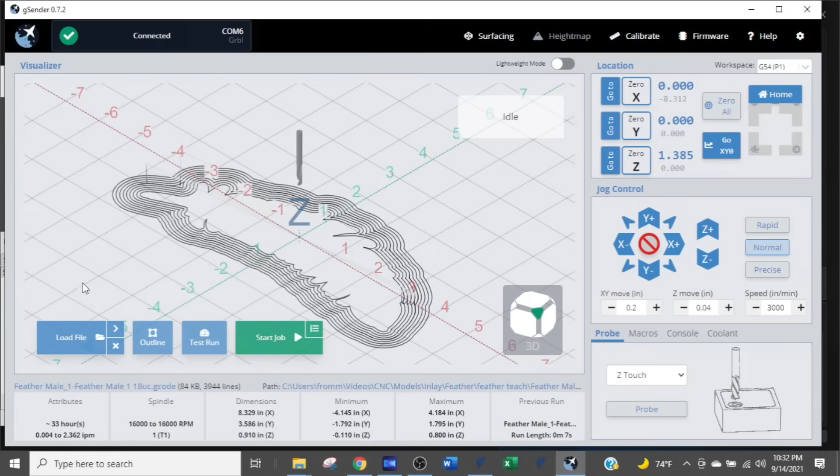So what we're going to do is come back to Load File, select it, and we're going to find the feather male number 2, which is right here, and it has the 90-degree V-bit - that's the bladed V-bit, which I absolutely recommend that you use over the flat bits.

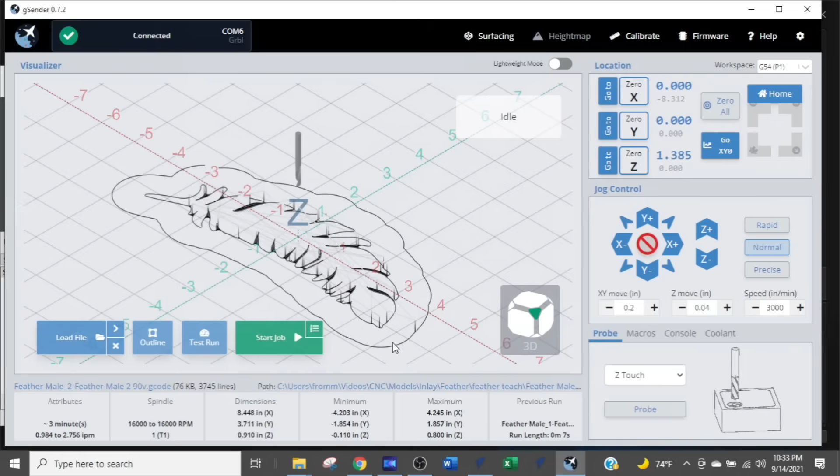All right, so when that imports, you can see there's a dark line around that outside perimeter that we had. That bit is going to follow along that perimeter on the outside. It's going to V-carve the outside, an area we don't need, but that's okay - it doesn't take that long.

And then it's going to go around inside the feather, following the perimeter of the feather, and then it's going to do a lot of clear cut where the 1/8-inch bit couldn't get to. So when all is said and done, this will drop right in after we do some cleanup.

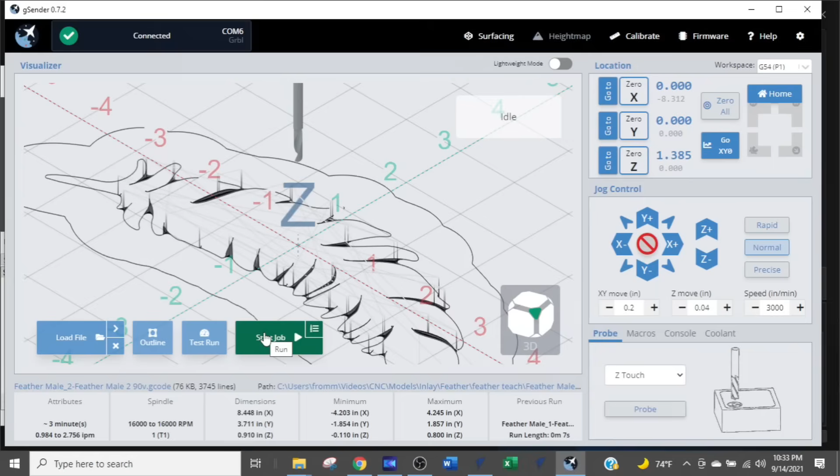So now all we have to do is hit the start button and run the job again. And here we go.

And now we're running around, and you see it's cutting the profile on the outside. Now you start to understand why that burr doesn't matter, and why you want an aggressive bit, especially if you can just make multiples of these things like I did.

I mean, once you make one, it's kind of an addiction to do these inlays. So I hope you've downloaded this feather inlay program I've given you. Remember, I'm giving you the G-code, I'm giving you the instructions, and I'll give you the file.

Now, you can see that the 90 is coming back in. It's cleaning up a bunch of messy little spots that the 1/8-inch end mill couldn't get to. So it's going to do a lot of bouncing around here, and not very efficiently.

This is probably the longest running program of the bunch, and I'm going to say it ran for about 5 minutes. But look at the feather coming to life already.

This is the male insert. Now it's done. Literally, we take it off, and you'll find in just a minute that all we have to do is get the burrs off of it and insert it into the female part.

And of course, now we have to separate it from the table, so I have to use a little stronger scraper. But now you see how strong the CA glue is, and what's so nice about it is you don't have to use clamps. Look at that feather - if you're not impressed by now, you should be.

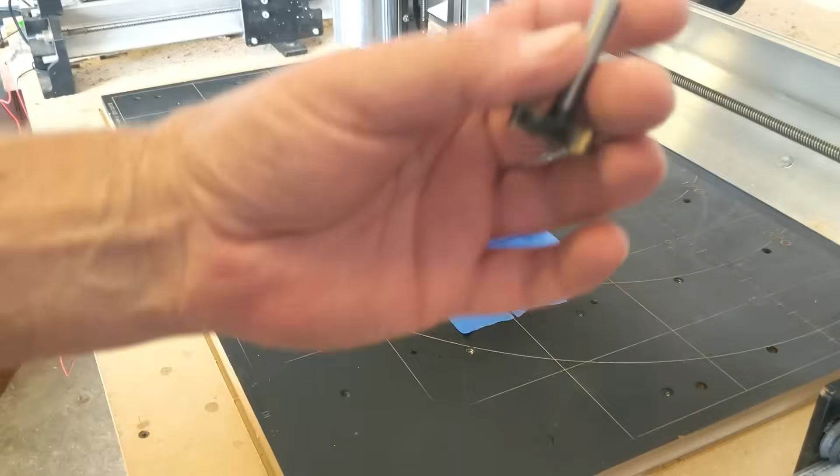Now, this is a surfacing program I'm going to give you as well. We're going to use the 1-inch surfacing bit. This is a bit that I seem to have a hard time holding on to in the store. It sells out fast every time I put it up, and it takes me a while to get it. If you need a surfacing bit and don't have one, you can get that one. So we're going to set that up.

Now we're zeroing it off the base piece, and then I have to set my edge up. I'm just eyeballing it. The surfacing program is quite a bit wider than this project here, so I left plenty of room for air cuts. But I started my program off wrong, so you see I got a little cut where I didn't want it, and I had to rewrite it real quick.

And this is where the fun begins. This is it. This is the moment you've been waiting for. This is exactly what you're going to have when you do an inlay. If you follow these steps, look at this thing come to life. Now, do you want to go do an inlay or not? Look at that, that is so cool. And I want you to see how crisp it is.

Now I have a little bit of a circle mark there and some streaks from my bit, but that's okay, we will sand all that out. Look at this, this is off the router, not sanded, raw. Look how sharp that looks.